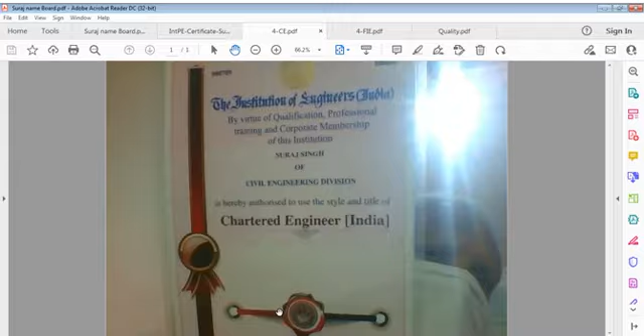As usual, I put in my views every day, and today is also nothing different. It's complete communication for dissemination, for sharing information with others.

Information - some minutes are taken for introduction, which is very important because people have to know about me, and I have to know about you as well, but I'm not getting any feedback unfortunately.

This is my professional identification based on competencies, whatever I have achieved so far. There's no claim on that, but yet we can say something is better than nothing, and competency ensures that person may be responsible, though I'm not very much responsible, but I'm not talking about myself, I'm talking about everybody else.

This is my name, my professional identification. This is FIE and Chartered Engineer, registered or enrolled in Institution of Engineers India, which was established in 1920, and later on it was incorporated by Royal Charter in 1935, which is like Constitution of Bharat India. You may say it's a statute.

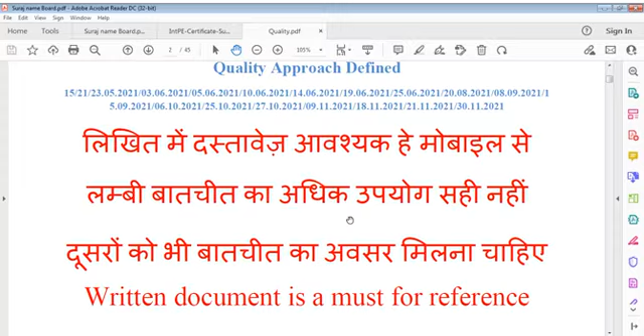Time has gone when documents were very essential. There was a time, and now, unfortunately, the young generation who has no experience in life about work, they don't value documents to that extent.

This should be referred, this should be referenced, and this should be used. Document does not mean paper document. What I mean to say is document is a record, a valid record. We don't want to understand what is validity and what is record.

Record of every consideration, record of every item is very important. Whatever we study, we study books when we conduct our examinations or our preparations - we prepare for examination, or even if there is no examination, we prepare for learning. Ultimately, learning is the destiny and not examination.

For learning, we have to refer to some instructions. These instructions may come from documents, from books, or from teachers' explanations, and we make notes. For that purpose, whatever notes we make in class, that is also a document. Now it's a digital world, something has changed, but the basics remain the same. Information is the same - whatever I need, I require to remember or to understand or to analyze, that is important.

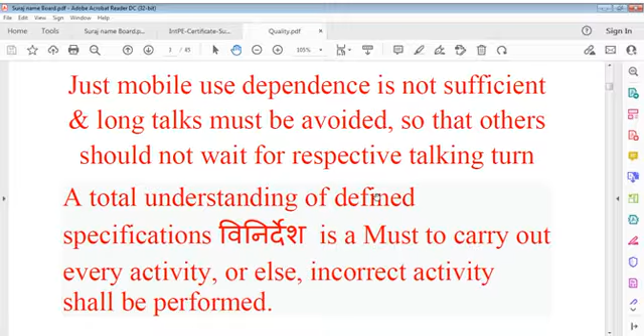When I talk of engineering, I talk of contracts - it's my working profession, not just a profession for sake of pleasure. It's my profession, as well as your profession if you are in engineering or some other profession, that you have to develop this world to whatever extent you can.

The scope of everybody - as in contracts we define scope, I can say in this life we have some scope of work, scope of instruction, you can say you have been given instruction by that power. It's not a contract, but it is your requirement, it's your soul that comes onto earth to develop it. And that development - since many people are involved in life, unless you are alone, that's different - we have to think about what I have to do.

My qualification, say I am an engineer, doesn't mean it's everything. It's only a measured capacity, a competency, a measured volume of knowledge that is equivalent to saying I am an engineer, or a doctor, a professor, this and that. It's only a character, only a quality that defines that one.

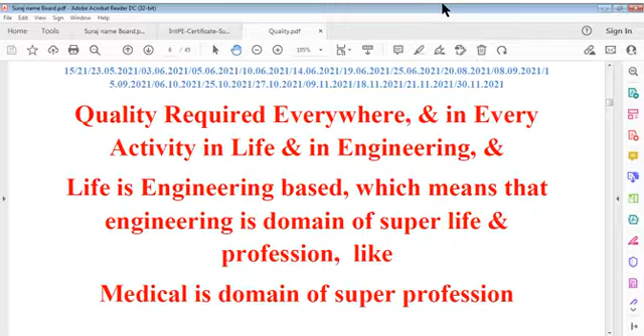And that you can say defines limited quality, or you can say unlimited quality. It depends.

I have put this in Hindi also here, you can read it. I don't read it every time because I have already defined it. I just want to impress upon everyone that you cannot accurately get quality done without going through the whole scenario of the work.

Engineering is not a subject where you can apply things directly. There's a thorough system, just like we define a quality system. It's one of many systems, and there are systems in everybody's life.

Some comply with those systems, some define systems for themselves, and sometimes we don't even apply them. If I devise a system for myself, I don't stick to it, I keep changing it every day because I cannot control myself. I take it easily, just like we say control, and it's very easy to say control.

Control is a word you apply onto yourself, which is very difficult in fact. But control is the base of quality. If there is no control, we cannot achieve quality.

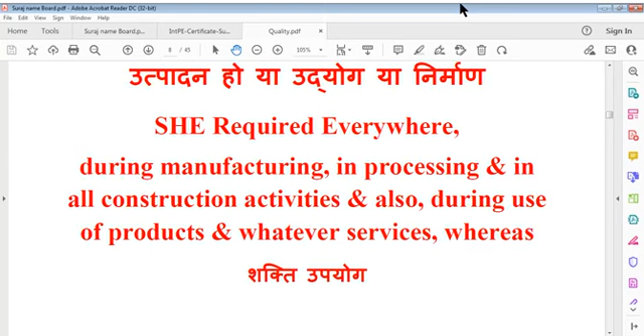Mistakes are the biggest teacher in life. But if I don't realize that fact - even if there's some school or university, teachers are there and they teach, and even after the teaching, they find that students make mistakes, and that's the learning process. You have to learn. Learning never ends. It never ends in life. Learning is very, very significant, and we have to do it that way, with no way to avoid it.

Quality cannot be declined, quality cannot be deferred, quality requires to be done. Nobody can say don't do quality work. Claim is one part, but delivery is another part. There can be whatever level of claims, but if the product does not give that, all those claims result in falsehood. Quality, I understand, is your own system, your own mind, your own framework. You define, you decide, you do, and you then see yourself what you have done.

I am more concerned about engineering here because civil engineering - which we call building engineering, road engineering, sewer line engineering, water line engineering, or structural engineering, or whatever sort of life is involved, irrigation engineering, facilities engineering, infrastructure engineering - it is the widest engineering as far as original work or original initiation is concerned. I'm not claiming this because I am a civil engineer. It is not that. Whether I am civil engineer or not, that's not a requirement here. There's no claim here. In fact, I don't know what engineer I am. Why did I write civil engineer?

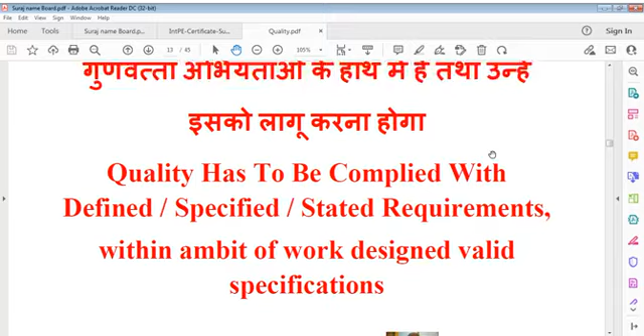When I say quality must be complied with, complied with what? Quality requires to be complied. But this means complied with something which is defined. So what I mean to say is, quality is a part of quality itself.

There are many sections in a quality statement and many subsections in the same statement. They should comply with each other. This means there is a sequential approach, one after other and after other and after other.

Just like we can say we do some slab work, RCC slab, you know what I am talking about. Construction of structures involves many more elements in it. We call it civil engineering, but actually it's not civil engineering alone. There are inputs, maybe not 100%, but 20, 30, 40% from other disciplines or other branches of engineering.

When you do an ordinary slab or structural work, we have to provide certain services input. These services may be electrical service, mechanical service, or air conditioning service, or plumbing service, or gas service, or building management service, or some other service, firefighting service, fire suppression service, fire prevention service.

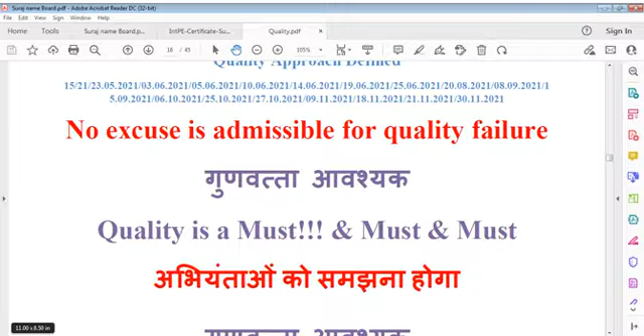So it's therefore very important that we realize quality is a must. Maybe it is a very boring statement for you, but boring or not, facts cannot be denied. If quality is a must, must and must, then what's the meaning of that? Its meaning is: don't think otherwise. Do not think otherwise. Think quality, do quality, achieve quality.

Very difficult, because people don't want to understand anything. They say, this time it's okay, next time I'll see. I don't really understand the meaning of what they want to say, which is this time and which is next time.

There is no this time and there is no next time. It's only in your imagination. It's only escapism, you can say. Oh, this time I did it, no problem, next time I'll do best. Why? Why do you think this time and that time? Why should I differentiate?

I am a customer, I am a consumer. I want every time.

That is an important point, you can say. In your organizational studies, or management studies, though I'm not qualified in that, experience is something different. There is no exclusively technical experience versus non-technical experience. No experience is ineffective.

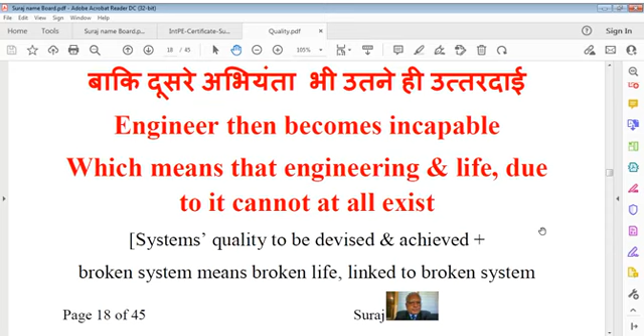And if you see, we are not bound by anything. First of all, engineering, particularly civil engineering, is something based on procedures. Of course there are testing controls, but I don't think those are based on any detailed experience, they just represent something for nothing. I don't like those people who do nothing and represent for everyone. That's nonsense. That's why we say we have to be realistic.

Sometimes on one project something is quality, on another it is not. It can be possible. But ultimately, as we said in one of our talks, I think I remember talking about... it is the White Book, let me see where the White Book is. FIDIC White Book, as I mentioned in the last talk. The FIDIC White Book is the design contract, you can say it's a design service contract.

Just like we studied about Annex SL, it was for, as we said, the model service contract. Actually, I've gone to the wrong file, no problem. We covered services, what services they have to give, what we have to do, and it was complete there.

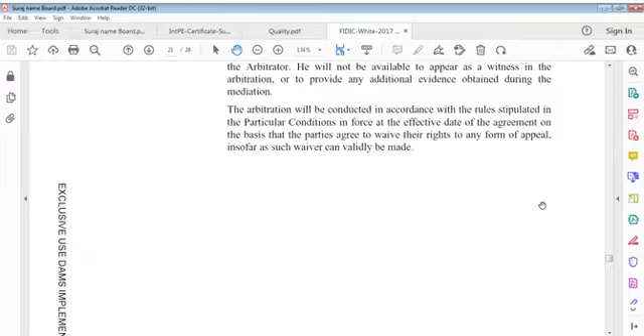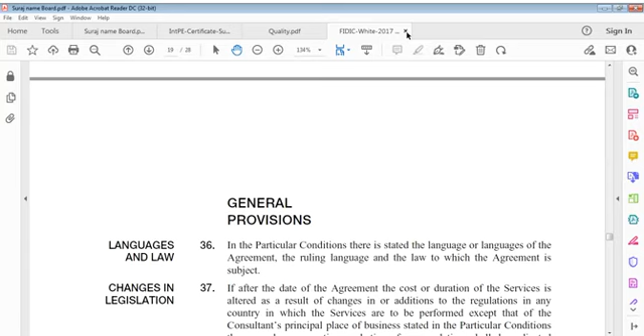But I had another one that I shared with you, about various files on construction, about contracting, about designs, and I shall share with you. Let me try to find that one, because sometimes something more important needs to be studied.

Let me show you a brief about some important items related to quality. Of course, this is about concrete. Maybe I shared it long back, but this is also a specification of concrete. Just for the purpose of quality, I am trying to share some reference on it. It's only a reference I am trying to show you.

And this is Qatar. Why am I taking Qatar? Because I have experience of Qatar too, so I try to share something I know. I'm not saying this is mandatory for you or for people, it's up to you which specifications you refer to.

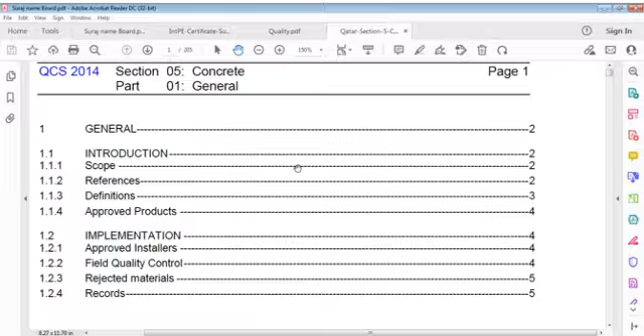If you go through this, you'll see it's an index of contents, and it says general - this is general in section 5 of the specification, general in this concrete section. What is general? Introduction, scope, reference, definitions, approved products. Then implementation: how does it implement? Approved installers, field quality control, rejected materials and records.

If you go further, you'll find that in general, introduction is given. Likewise, what is given here is very important: this section includes requirements for concrete work - for pipeline, roadworks, runways, structures, water retaining structures, foundations and bases for structures and equipment. Also, this introduction part I am going to discuss.

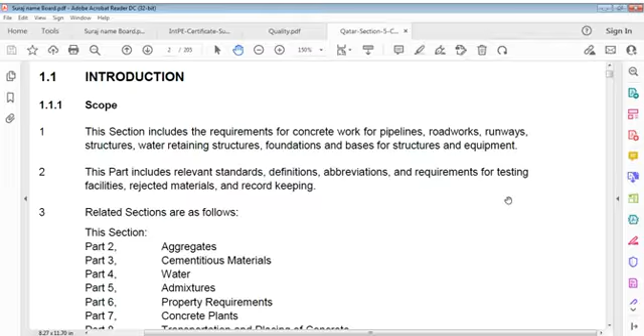This part includes relevant standards, definitions, abbreviations, and requirements for testing facilities, rejected materials, and record keeping. I'm just showing you this, I'm not straying away from the contract. Related sections are as follows.

Let's say this section we are saying goes from part 2 to part 19. This section we are going through now is maybe part 1, you can say. Then we have part 2, that's aggregate - this section includes aggregate in the same file. And then part 3, cementitious materials.

Cementitious materials are many - we'll see what are those, like PFA, GGBS or microsilica, and many more could be. Then aggregate also, you can say it's fine aggregate, coarse aggregate, and maybe part 4. Water is very common - meaning construction water, not exactly bottled water, but construction water that doesn't cause any harm to inert materials.

Same way, there is admixture requirement, then admixtures, and of course after that property requirements - what are the properties that you want to achieve? Based on that, designs are available. Of course, we can say property requirements, then concrete plants, followed by transportation and placing of concrete, because from the plant itself, transportation is required once it's mixed and sent to site.

Transportation, placing of concrete - transportation and placing - and of course then formwork, how formwork is done for that placing, because without formwork no concrete can be cast except on ground, and even on ground you need this action. So formwork and curing comes into picture, and of course reinforcement is there too - reinforcement, formwork and curing, and then construction joints.

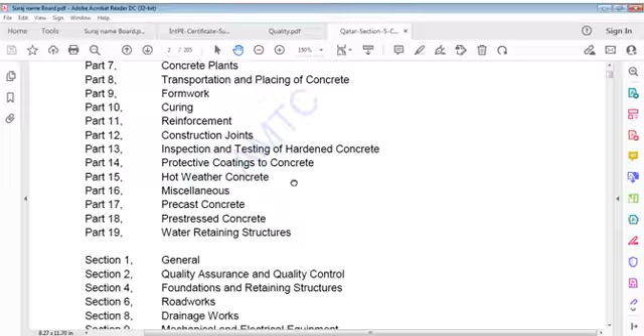Then we have construction joints, inspection and testing of hardened concrete, protective coatings to concrete, hot weather concrete, and miscellaneous. Of course, then we have to understand precast structures. Precast means which are not cast in situ, as done before.

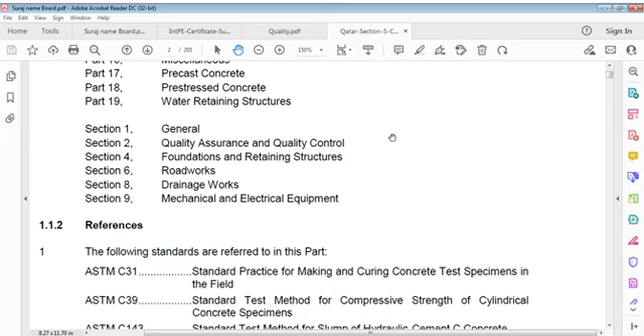We have to then go to pre-stressed concrete, water retaining structures. Same way in these sections, there is general and then quality, of course foundations and retaining structures, then roadworks, drainage works, mechanical and electrical equipment. These are, of course, very informative chapters.

Then we have references, of course standard practice for making and curing concrete test specimens in the field - very important. So it looks very funny, meaning what you're talking of is curing - it is not talking of that, it's the standard practice for making and curing concrete test specimens in the field, and then standard test method for compressive strength of cylindrical concrete specimens.

Then we have standard test method for slump of hydraulic cement concrete - that is slump - and then temperature of freshly mixed hydraulic cement concrete. These are very basic; if you do not have information about this, how can you control it?

Of course, there's the dictionary or glossary of building and civil engineering items. Then tests for general properties of aggregate, methods of sampling, and tests for general properties of aggregates, and methods for reducing laboratory samples, then sampling fresh concrete on site.

Then you can say methods of sampling fresh concrete on site, testing fresh concrete with the slump test, and of course shape, dimensions and other requirements for specimens and molds. Therefore, making and curing specimens for strength tests.

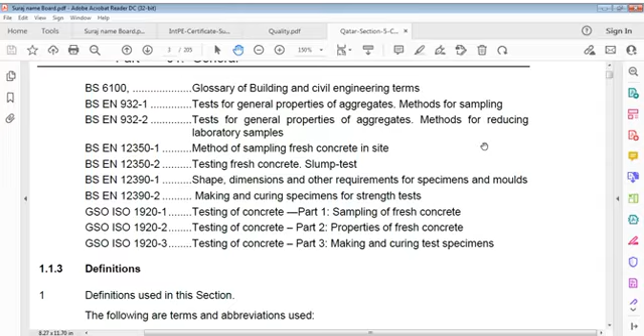Testing of concrete includes sampling of fresh concrete, testing some properties of fresh concrete, and making and curing test specimens. Then we have definitions which we should know well as engineers. Here is a collection of common definitions used in engineering, just for general knowledge. I'm sharing this with you, not as an expert, just an ordinary person, but we should have this information.

We have units like degree Celsius, calories, centimeter, day, and characteristic compressive strength of concrete determined by testing cylinders. Compressive strength is written as FCK, that is characteristic compressive strength, where K stands probably for characteristic. FCK for cylinders is characteristic compressive strength of concrete determined by testing cylinders. Then FC cube is compressive strength of concrete determined by testing cubes. So there's a difference between characteristic strength and other strength.

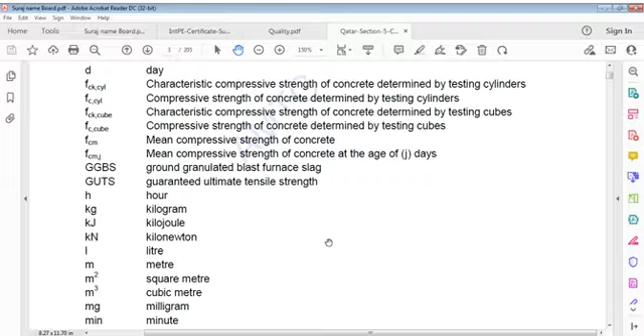We have many more parameters. Here is guaranteed ultimate tensile strength, GUTS, and GGBS is ground granulated blast furnace slag. H stands for hours, KG for kilogram, KJ for kilojoule, KN for kilonewton. Likewise L stands for liter, M for meter, M square for square meter, M cube for cubic meter. MG is milligram, min is minute, MM is millimeter, MM square is square millimeter. Months are months. Then megapascal is MPa, and kilopascal is kPa.

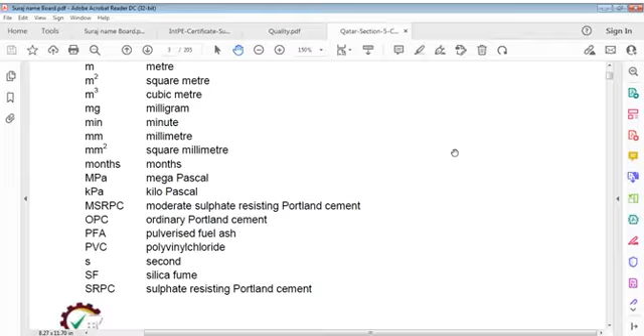MSRPC stands for moderate sulfate resisting Portland cement. OPC is ordinary Portland cement, PFA is pulverized fuel ash, PVC is polyvinyl chloride. S stands for second, SF is silica fumes, and SRPC is sulfate resisting Portland cement.

A ton is 1000 kilogram, ppm is part per million, and micron is 10 to the power minus 6 meters, that is micrometer.

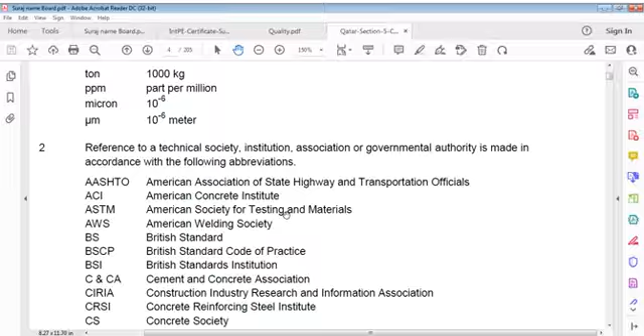Reference to technical society, institution, association, or governmental authority is made in accordance with abbreviations. What are those? There are so many institutions here, just for information.

AASHTO is American Association of State Highways and Transportation Officials. ACI is American Concrete Institute. ASTM is American Society for Testing and Materials. AWS is American Welding Society. BS is British Standard, BSCP is British Standard Code of Practice, and BSI is British Standards Institution.

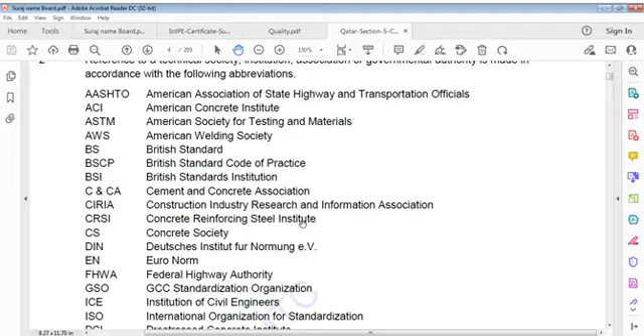There are many more abbreviations you can go through yourself. Then there are approved products. What is the meaning of approved products in this specification? I'm just giving a reference, we'll go through this very important topic and the particular technicalities involved.

Contract specific documentation may identify approved products and approved or pre-qualified manufacturers and suppliers of product. Then we have to look at implementation, how to implement, and we have to see rejection procedures and other evaluations involved.

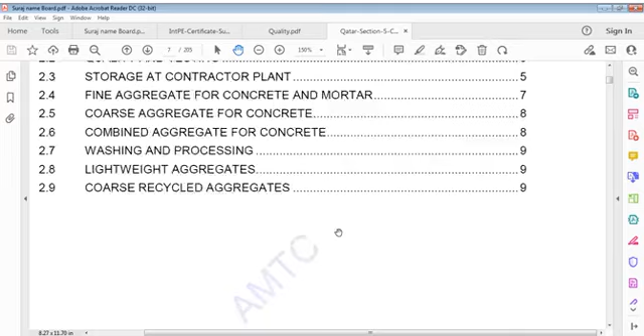Then we have another part, Part 2, aggregates. In that, very simply, it covers scope, references, definitions, source approval, sampling, quality and testing, storage at contractor plant, fine aggregate for concrete and mortar, coarse aggregate for concrete, and combined aggregate for concrete and for floor.

Likewise we have to do sampling of these: fine aggregate for concrete and mortar, coarse aggregate for concrete, combined aggregate for concrete, washing and processing, lightweight aggregate, and coarse recycled aggregate.

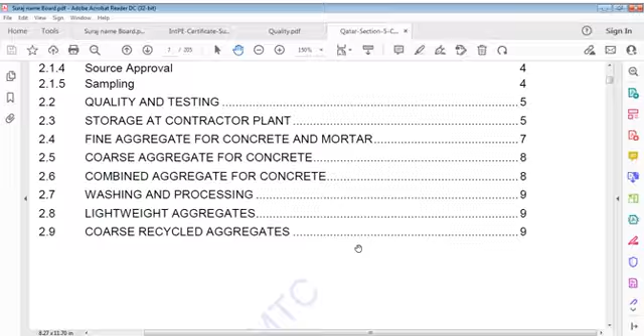Then we have to see what chapters are there in general for aggregates itself, just for information. There is cementitious materials, Part 3 water, property requirements, concrete plants, transportation and placing of concrete, hot weather concreting, structural precast concrete, pre-stressed concrete. These are some chapters, only some given, some missing. References are there too but we cannot waste time on this. That is aggregate.

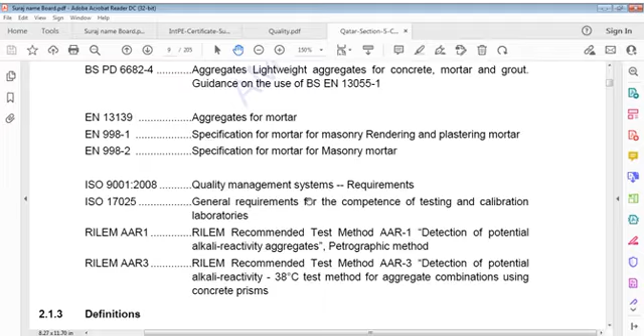We have to find information from whatever source is available. For example, lightweight aggregate is defined as aggregate of mineral origin having particle density not exceeding 2000 kg per cubic meter, or a loose bulk density not exceeding 1200 kg per cubic meter.

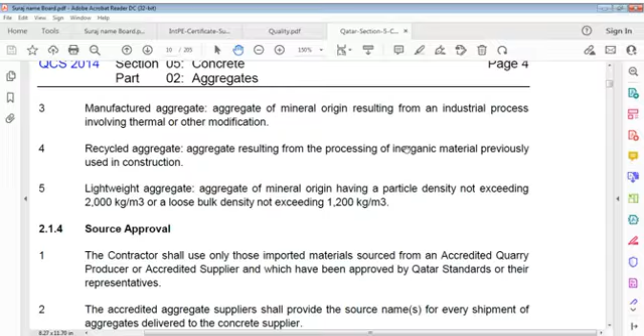Then there is source approval. We have to approve the source as well, whatever sources are there, sampling, and we can see that. Quality and testing, that's the important point, because this chapter is about aggregate. Quality and testing.

It generally says that aggregate shall consist of tough, hard, durable and uncoated particles. No coating is required on that because it's aggregate, the question of bond. Aggregate shall consist of tough, hard, durable and uncoated particles containing no harmful materials in quantity.

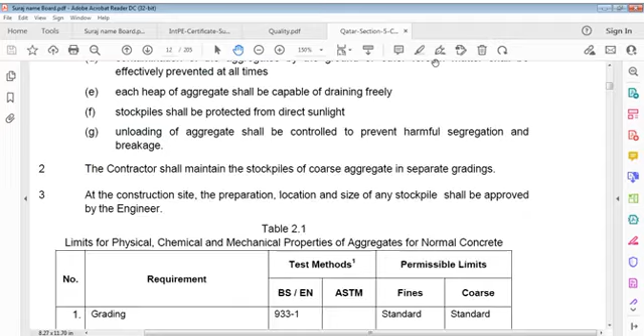In that case, we have to test the quality of these aggregates, and then storage at the concrete plant aggregate, how this will be stored. That is what is defined here, and we will go through that as well. And what are the various limits? That's what they say - limits for physical, chemical and mechanical properties of aggregates. That's a very important part, in which there's a bifurcation, meaning test methods, and where applicable.

Then you can say grading, natural crushed rock, fines, clay lumps, lightweights, etc. All these are a long list with notes about that.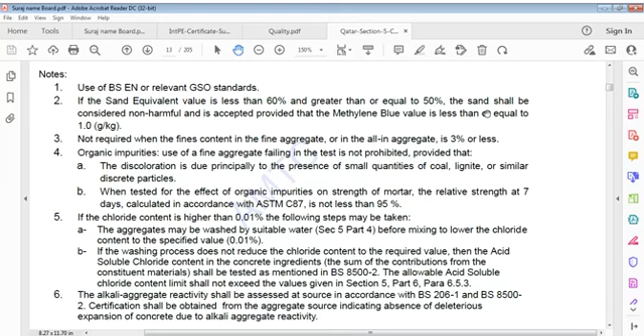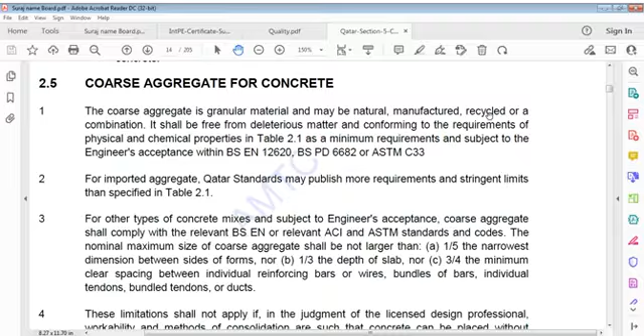Combined aggregate - material passing the 0.063 mm sieve shall not exceed 3% of combined aggregate by weight. Combined aggregate grading used in the work shall be as specified.

After that, we have combined aggregate questions, and material passing 0.063 mm shall not exceed 3% of combined aggregate by weight. Combined aggregate gradation used in work shall be as specified, except when otherwise approved or directed by the engineer. Changes in approved gradation shall not be made during the progress of works.

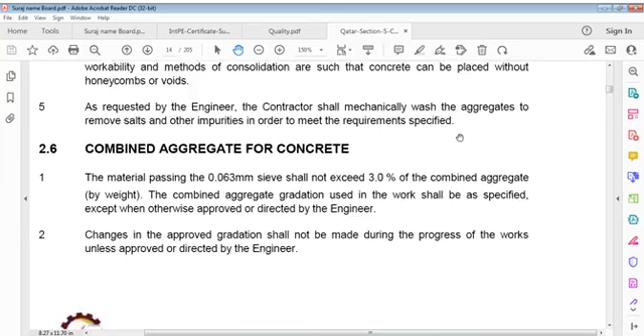Washing and processing of lightweight aggregate - lightweight aggregate is very important to define, where density never exceeds 2 tons per cubic meter.

Then we can say coarse recycled aggregate. It's also very important, as we know. This concerns excavation waste, of course - coarse recycled aggregate and coarse recycled concrete aggregate shall meet with requirements with the...

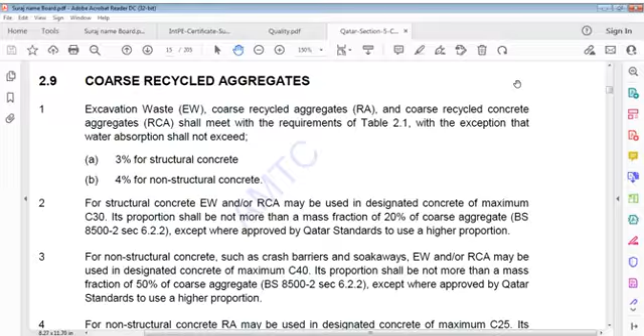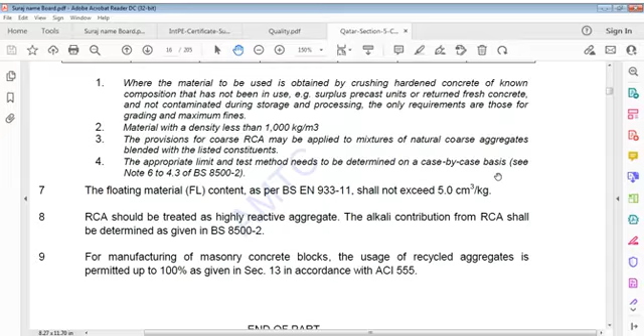Coarse aggregate, we understand. Then if we go further, we'll see concrete aggregate. Then there are various types of aggregates defined in this, that is RCA and RA. Then floating material, how much - likewise we have to see this.

And then concrete, cementitious materials - very important one, cementitious materials. That is, if you see concrete - concrete and cementitious material, which covers the requirements for testing and use of cement in structural concrete.

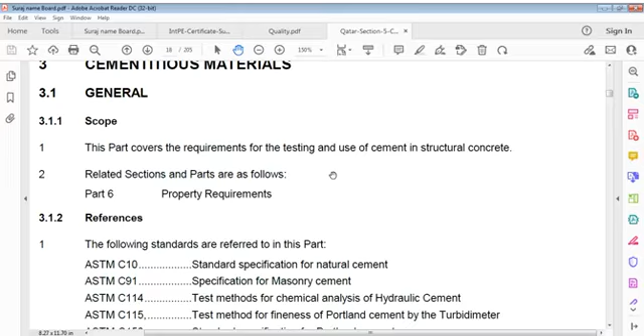In this we have various standards, like standard specification for natural cement and for masonry specification, and then test methods for chemical analysis of cement, fineness methods for fineness of Portland cement, and standard penetration, standard specification - likewise all these tests are defined in this.

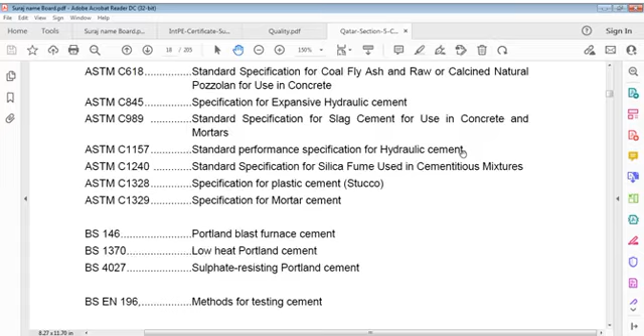And then cementitious material continues, and should be - cementitious materials means cement composition, specifications and conformity criteria, and of course chemistry. We have cementitious materials like Portland cement in combination with one or more of the following: blended hydraulic cement, fly ash, and other pozzolans, ground...

We have two terms and conditions, and these are very important. Portland cement in combination with one or more of the following: blended hydraulic cement, fly ash and other pozzolans, ground granulated blast furnace slag, silica fume and metakaolin, subject to compliance with requirements of this specification.

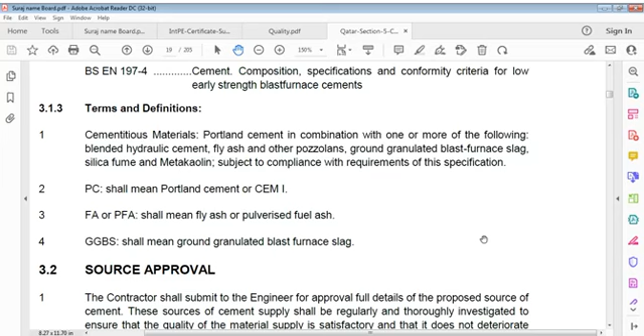Then we have to jump to PC, which shall mean Portland cement, and FA or PFA, that is fly ash or pulverised fuel ash. Then we jump to GGBS, that means ground granulated blast furnace slag. And for sources, we have to see approval, then sampling and quality testing. Likewise, we have to go to delivery, storage and handling, because cement is a kind of very low profile protected material.

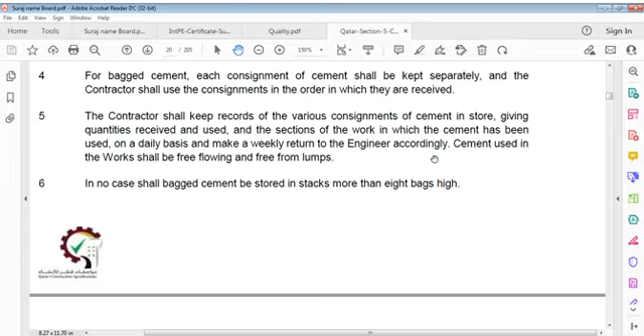Of course, we have to deliver all this, and we have to go to how to store it, how to do it. The specifications are available.

We have to see water, which is a very important item, without which we cannot say anything. Water, that is, what is the quality of water, what is its pH value and permissible temperature, etc.

Health and safety. There's water again. This part includes water used for concrete mixture, washing of aggregates and equipment, wetting of surfaces or ponding, ponding during curing or whatever.

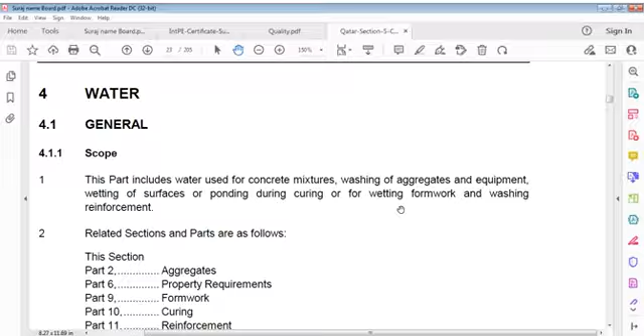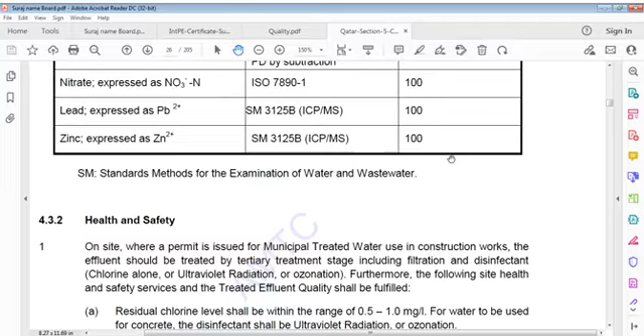Of course, then we have to see how it works, and we have to go further into quality of water, what quality it should have, what pH value, and we have to study all this once again so that we know what the actual one is. Health and safety is another criteria.

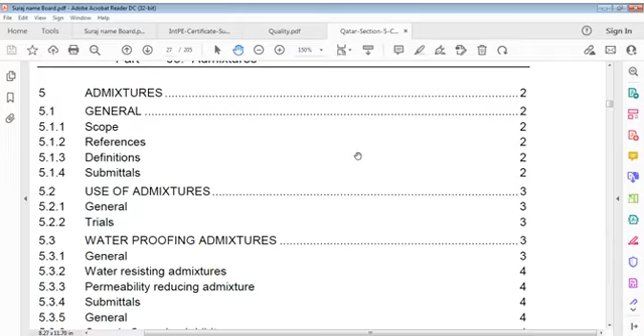We have admixtures, different admixtures are there. These are used and included depending on requirement. For the requirement you have concrete, and we have concrete itself with admixtures, in continuation, organic corrosion inhibitors.

Then you have property requirements here, property requirements ultimately. Because concrete is a very important part in contracts, so we have to study this.

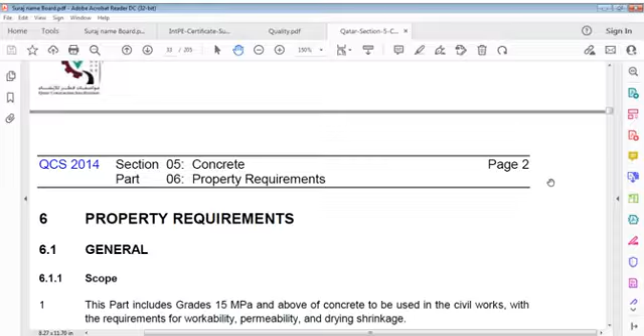Let's read what are its parts in this: general and scope, references, definitions, submittals and exposure classes. Of course, fresh concrete and grades of concrete, durability requirements, etc. Then, what are property requirements of concrete?

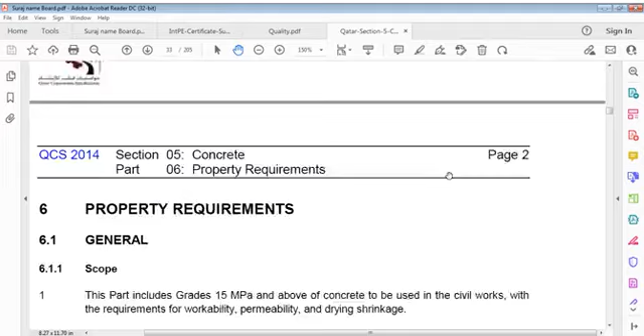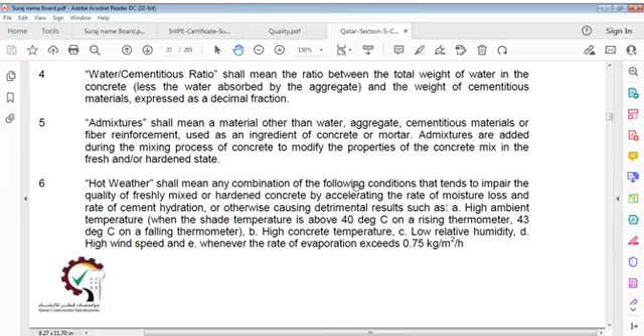Property requirements of concrete are these. We can say here is something which defines some classes of concrete. I think there are so many classes here, up to, you may say, class 0 concrete is class X0.

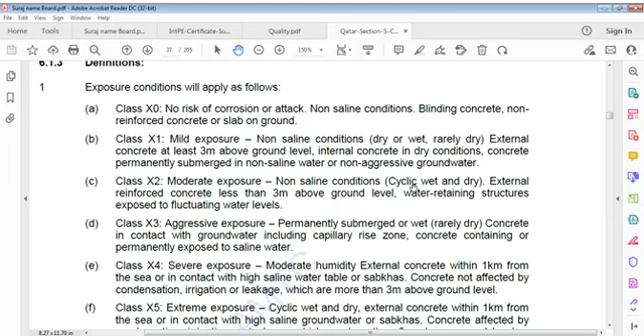And then water cement ratio and admixture. Hot weather shall mean what? It's a very important point. Hot weather is very important here.

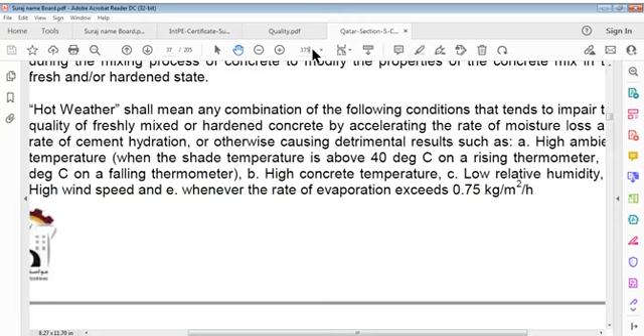So, hot weather means a combination of the following conditions that tend to impair quality of freshly mixed or hardened concrete by accelerating rate of moisture loss and rate of cement hydration, or otherwise causing detrimental results, such as high ambient temperature when shade temperature is above 40 degrees Celsius on a rising thermometer, or 43 degrees Celsius on a falling thermometer.

In this case, hot weather means a combination of the following conditions that tend to impair quality of freshly mixed or hardened concrete by accelerating rate of moisture loss and rate of cement hydration, or otherwise causing detrimental results, such as high ambient temperature when shade temperature is above 40 degrees Celsius on a rising thermometer, and 43 degrees Celsius on a falling thermometer.

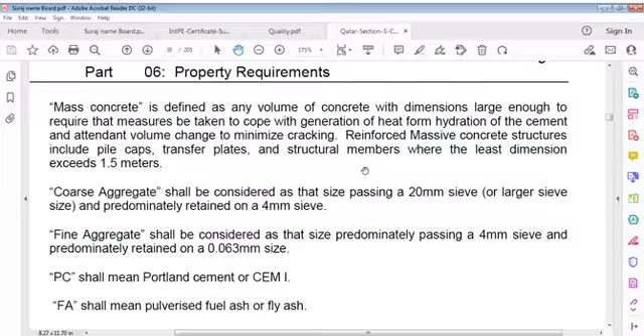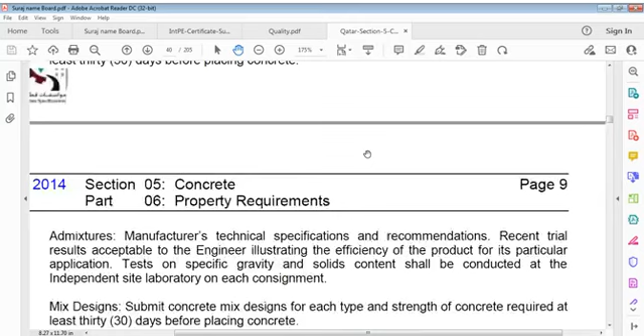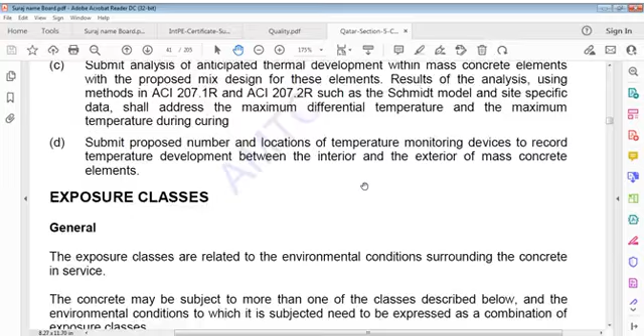And of course we can say exposure classes, reinforcement corrosion, and sulfate resistance. Fresh concrete is a very important part.

We have to focus on this fresh concrete, and it's very important to be serious about this issue. Where adequate workability is difficult to obtain at the maximum water cementitious ratio allowed, use of plasticizers or water reducing admixtures may be considered, or alternatively an increase in cementitious content may be considered, where this shall not adversely affect durability of concrete. These are the instructions.

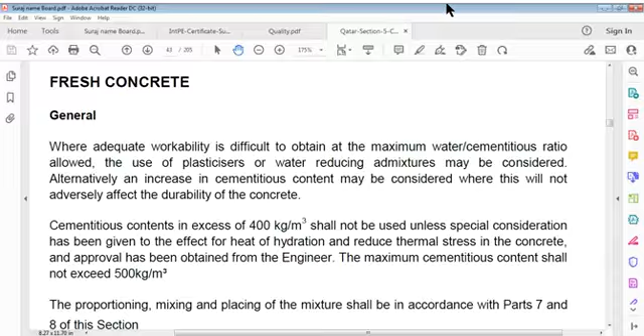Fresh concrete with cementitious content in excess of 400 kg per cubic meter shall not be used unless special consideration has been given to effects of heat of hydration and to reduce thermal stress in concrete. It's a very important point, and approval must be obtained from engineers. Maximum cementitious content shall not exceed 500 kg per cubic meter. That's the maximum.

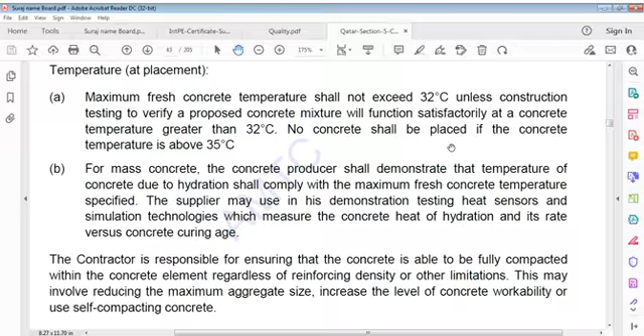After that we have another part: tolerances etc., and we have to see how strengths are required and checked, and what durability is. Though it's not fully descriptive yet, let us know something about it, if not thoroughly. Constituent materials shall not contain harmful ingredients in such quantities as may be detrimental to durability of concrete or cause corrosion of reinforcement.

Constituent materials shall not contain harmful ingredients in such quantities as may be detrimental to durability of concrete or cause corrosion of reinforcement. For reinforced concrete in ground, the need for protection from chlorides must be balanced against the need for protection from sulfates. Protective measures include use of surface treatment, alternative reinforcement, and increase in concrete cover in every case.

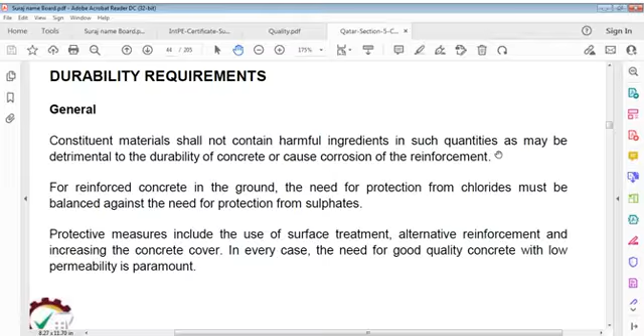Good quality concrete with low permeability is of paramount importance. Then we have maximum acid soluble chloride content. Chloride content of concrete, expressed as a percentage of chloride ions by mass of cementitious materials, should not exceed the value in Table 5.

Calcium chloride based admixtures shall not be used in concrete containing steel reinforcement or other embedded materials. After that, we look at maximum acid soluble chloride contents.

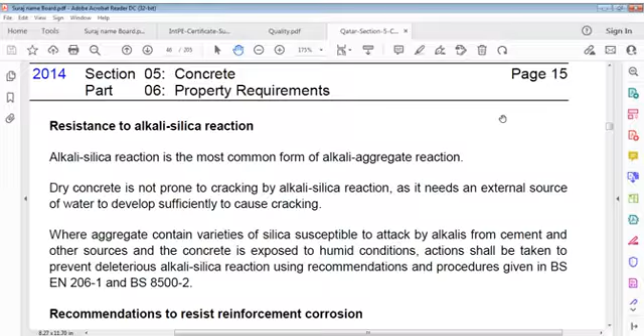Where aggregate contains varieties of silica susceptible to attack by alkalis from cement and other sources in the concrete, and the concrete is exposed to humid conditions, action shall be taken to prevent deleterious alkali silica reaction using recommendations and procedures.

Then we have recommendations to reduce sulfate attack, as we will cover in this case. Exposure classification shall be identified based on sulfate and magnesium contents in ground and groundwater, pH, and mobility of groundwater.

Recommended concrete specification requires terms of concrete grade and cementitious type. Unless stated otherwise by the engineer or project designs, all concrete below ground shall have surface protection to prevent movement of moisture from ground through foundation into substructure. Method of protection shall be in accordance with Section 15.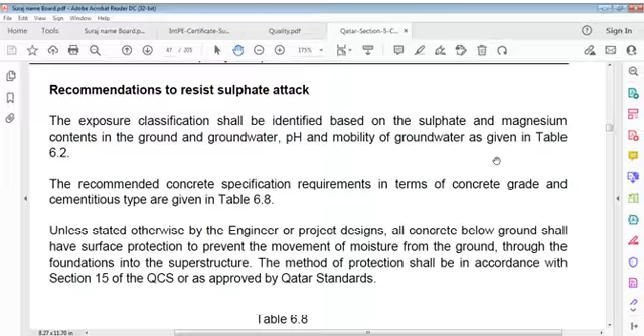The related properties are those. Durability of concrete is greatly influenced by the ability of concrete cover to resist forces.

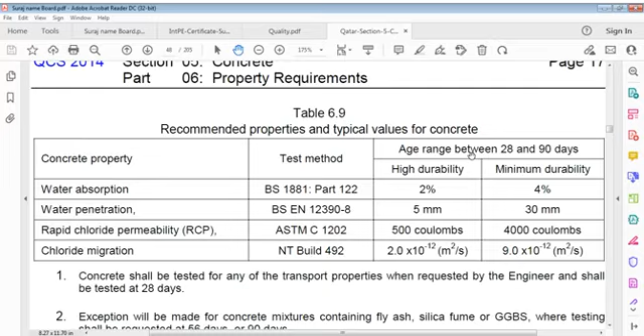In the same way, we have to understand durability of concrete, and that helps us. Then we can look at other property requirements of concrete: water absorption, water penetration, rapid chloride permeability, and chloride migration. Then design of concrete mixes, which is also a very important part.

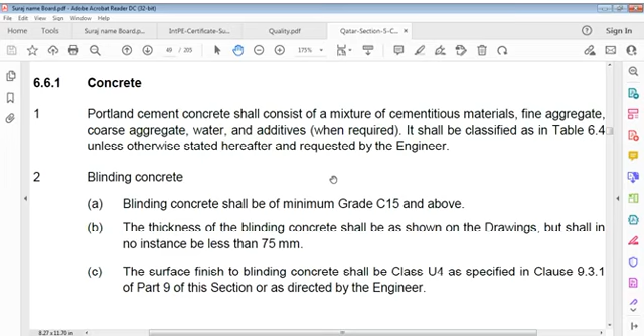After that we have to see others, mass concrete, as we have seen. It's a very important point for mass concrete.

Temperature is given here as we discussed before. Mass concrete, we also discussed here. Fresh concrete, I'm speaking on this very important point for everybody. Engineers are not clear about this. Fresh concrete temperature at placing shall not exceed 21 degrees Celsius. Fresh concrete temperature, it's not mass, actually massive block, it is major quantity.

Let me explain. This massive block means a major concrete pour with depth maybe a meter or more, and much more than 24 cubic meters. Fresh concrete temperature at placing shall not exceed 21 degrees Celsius to minimize thermal cracking. Higher temperature up to 27 degrees Celsius may be accepted with a demonstration of satisfactory performance of concrete, including mock-up and thermal calculations.

Fresh concrete temperature at placing shall not exceed 21 degrees Celsius to minimize thermal cracking. Higher temperature up to 27 degrees Celsius may be accepted with a demonstration of satisfactory performance of concrete, including mock-up and thermal calculations. Maximum allowable differential temperature between interior and exterior of massive concrete element shall not exceed 20 degrees Celsius. At some point this means you can say a 20-degree difference.

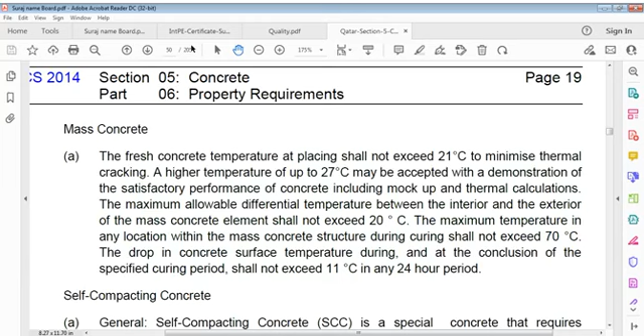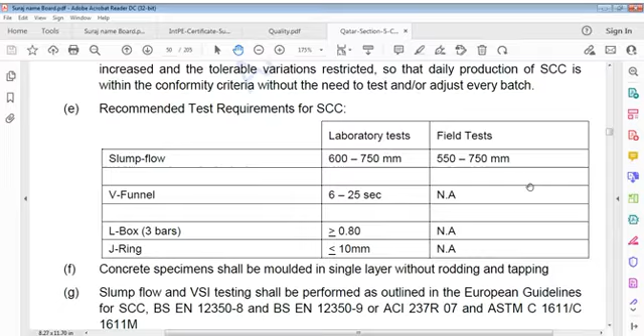Same as this. So slump, recommended slump, then V-funnel, L-box and J-ring. We also have to see this.

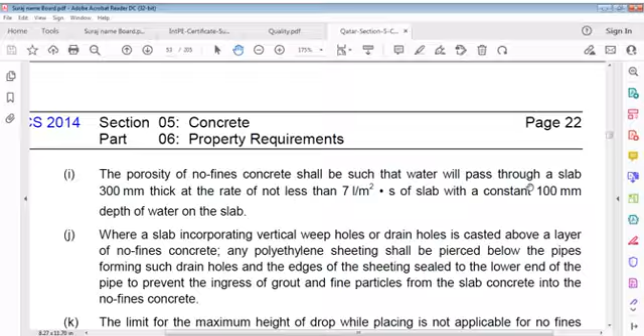It also says something about porosity of no-fines concrete: it should be such that water will pass through a slab 300 thick. Porosity of no-fines concrete shall be such that water shall pass through a slab 300 thick at a rate of not less than 7 liters per square meter. Per second of slab with a constant 100 depth of water on the slab.

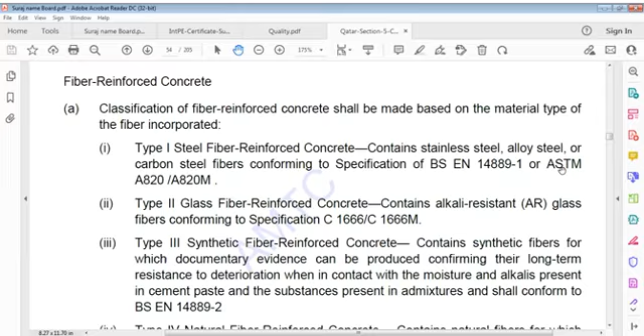We have then fiber reinforced concrete defined here. Fiber reinforced concrete, that is type 1, type 2, type 3. Contains stainless steel, alloy steel or carbon steel fibers conforming to specification A820, or BS EN 14889. Type 2 is glass fiber reinforced concrete -- the steel fiber is replaced by glass fiber. Contains alkali resistant glass fiber conforming to specification, and then synthetic fiber like this.

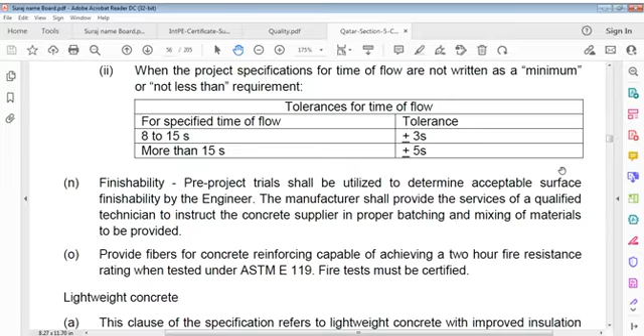We'll study that as well. And then we have trial mix. I have to conduct a trial mix, very important point. People these days don't do this, but it's very, very important because of so many restrictions, so many considerations -- trial mixes. As soon as the engineer has approved the concrete mix design for each grade of concrete, and during or following carrying out of preliminary tests...

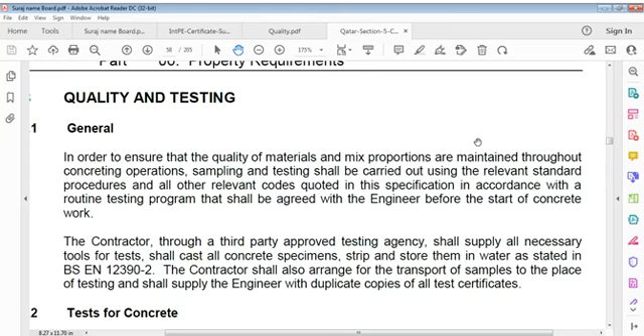Likewise, we can say quality and testing -- we'll see, it's very important, quality and testing of concrete. That's, we can say, then of course concrete strength, and we'll take this up later on. Now we'll close it for the time being.

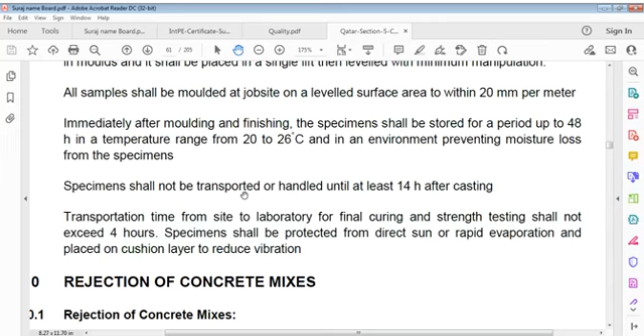Last 15 minutes, that's okay, I don't take more than this. And we have to then see quality of concrete testing, hardened test for fiber reinforced concrete, quality control charts, and work test cubes we have, and what is the rejection of concrete mixes, of course, and then unsatisfactory concrete works. I have to see how to do it.

Then, plants -- it is this concrete plant, or it should be. Then we have here general topics and likewise, so we'll take that up later on. Now I'd like to close this point itself and see.